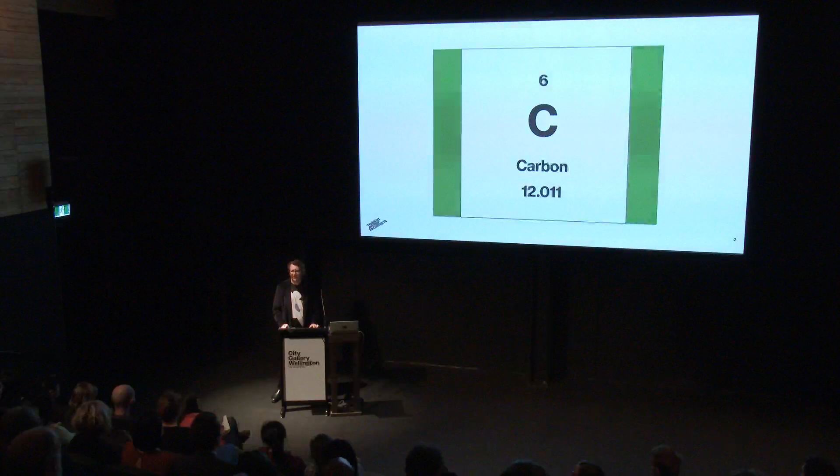But shortly thereafter, we worked on East Gisborne Airport with Eastland Group. Caitlin here, Caitlin there, put your hand up Caitlin, I was going to embarrass you. Caitlin worked on LCA Quick with the BRANZ free spreadsheet tool, and we analysed some steel portals and purlins for the building, transferred them from steel to timber, and saved 34 tonnes of carbon.

So we started learning about the numbers then, but we didn't really know what the whole building carbon was. Later on that project we employed a firm called eTool from Perth, and did a full LCA across all the modules, which I'll talk about shortly, and understood more about the carbon on that project.

After that, we've done 3 or 4 more eTool LCAs with an external provider. Caitlin has done BRANZ LCAs for other architectural firms, and we've also brought on One Click LCA to the office about a year ago, trying to bring that through as a business-as-usual tool. Everybody who's drawing is understanding how LCAs go together because it's a plug-in to our drawing program.

My discussion's got 5 parts. One, I'll talk about the global context and tell you why carbon is an issue, in case you don't already know. Two, I'll define a few common terms, because there's a lot of jargon as well. Three, I'll explain why it's an issue for us in New Zealand. Four, I'll show you what we're doing in our practice, 2 projects which are really pushing some boundaries.

And lastly, I'll give you some tips or thoughts about what we can all do - consultants, public, contractors. So to start, those 4, or actually 5 slides.

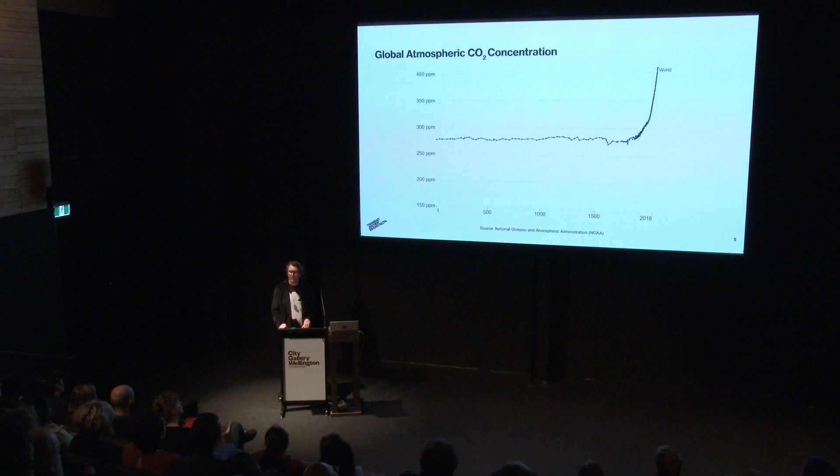This next slide is from the IPCC, the Intergovernmental Panel on Climate Change, and it's part of their conclusion that humans are responsible for climate change. I've also been reading recently that half the greenhouse gases emitted since the beginning of the Industrial Revolution have been emitted in the last 30 years. So we've had a couple hundred years since the Industrial Revolution, but half of those emissions came in just the last 30.

This slide shows the IPCC's 5 scenarios, depending on what we do and don't do. The decade we're in now is critical to how children will live, how much rain will fall, and how hot it will get. We're now at the bottom left, on that solid black line, but all the different coloured zones represent the different scenarios depending on how all countries respond.

It's important to note this is a global issue - no one country can solve it, it needs a global solution from all countries. An added complication is that rich countries have emitted more, and for longer, than poorer, less industrialised countries, so we need to help them become more carbon efficient. An Oxfam report found that between 1990 and 2015, the wealthiest 1% were responsible for more than twice the emissions of the bottom 50%. So we certainly have some work to do.

Starting from that bottom scenario, the 1.5 degree pathway - that's what we're trying for, what 198 countries signed up to in the 2015 Paris Agreement. But from my understanding, looking over the weekend, we're already at 1.4 degrees, unless this is an aberrant year - but they all seem to be aberrant.

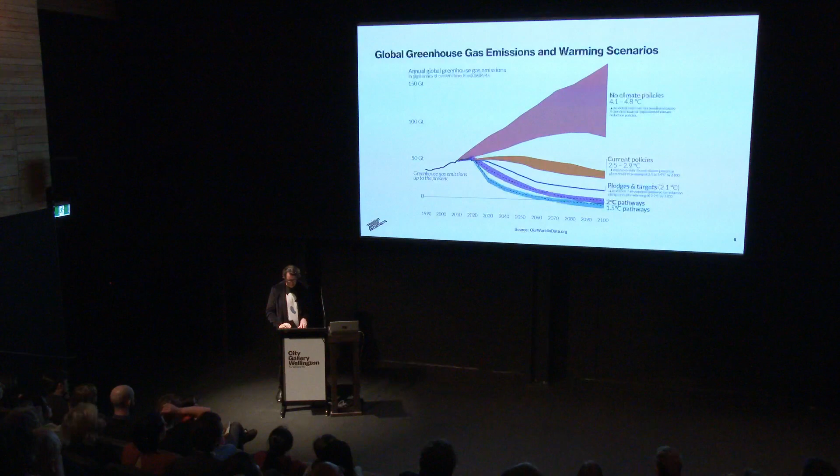The 2 degree pathway above that has more impacts and is more likely. The next pathway is current pledges and targets globally, so 2.1 degrees. Current policies - the actual policies in place - give us 2.5 to 2.9 by 2100, that's the orange band. And if we do nothing at all, obviously 4.1 to 4.8, which is pretty catastrophic. But it is just a graph.

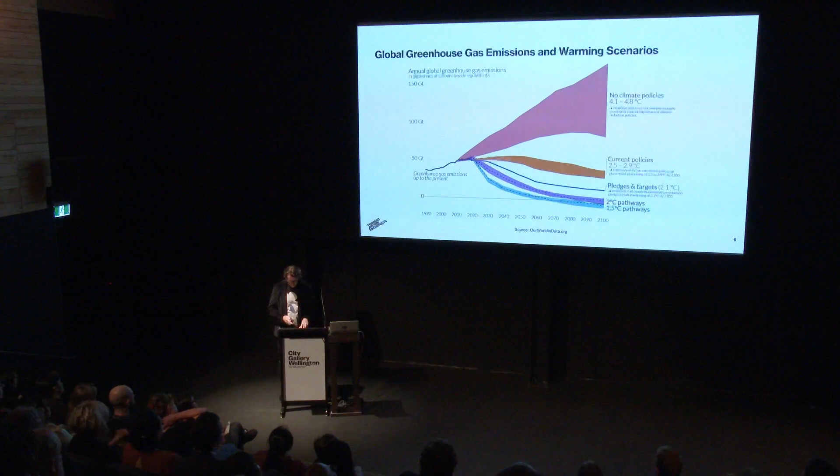Parts of the world may become uninhabitable, and it's going to affect everyone.

So that's the context we're living in - that's the risk to all our futures and the reason we need to work together. But as I said earlier, we've got to be positive, and I feel there's a lot of hope. But that's the hard part.

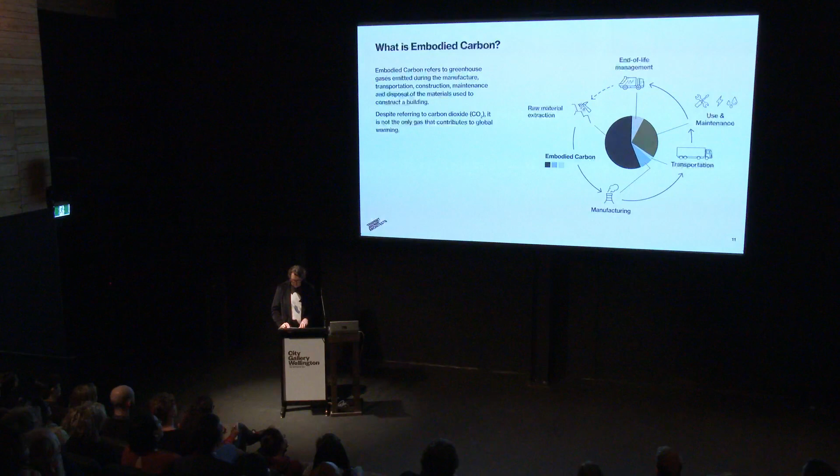So enough of definitions - what is carbon? We have embodied carbon. Embodied carbon refers to the greenhouse gases emitted during the manufacture, transportation, construction, maintenance and disposal of materials at end of life, used throughout the life of the building. So this highlights that when we measure carbon in a building through its lifetime, it's not just when we buy a product or build the building, but through the whole lifetime.

And as we've just noted, CO2 is not the only gas that contributes to global warming. This slide shows that in more detail. On the left, the bottom, it's our common metric, carbon dioxide, because it's the most common greenhouse gas. But as you can see, 1 kilogram of nitrous oxide is equivalent to 298 kilograms of CO2, and it's a byproduct from the manufacture of nylon and fertilizers.

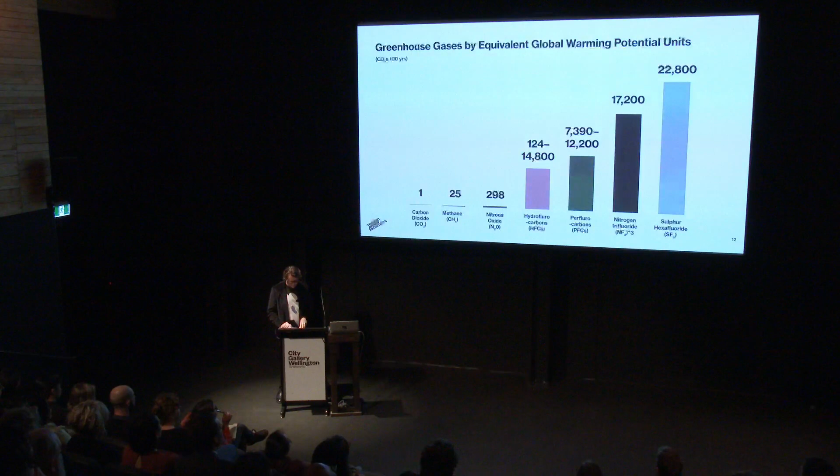But much worse, way over there, sulfur hexafluoride - that's in electrical transmission equipment, I believe. It's equivalent to 22,800 kilograms, so almost 23 tons of carbon per kilogram of that product. So kilograms of CO2e puts all these things in the same relative terms.

There's a complication here as well - there's a lot of complications. These gases all happen to have different lifetimes in the atmosphere. CO2 is 300 to 1,000 years, nitrous oxide is 150 years, and that sulfur hexafluoride is 3,200 years. So you're measuring these things in all different ways, but kilograms of CO2e is trying to use the common metric.

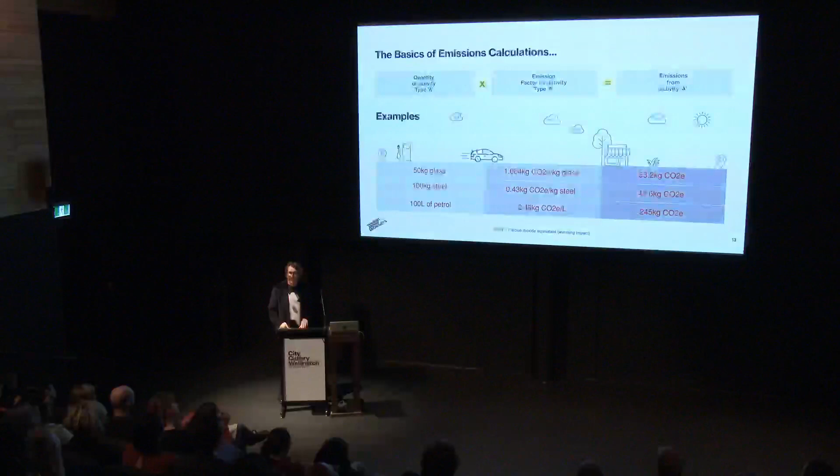Just the basics of calculating carbon for a building: you have a quantity of a material - a volume, an area, or a weight - and you multiply it by an emission factor. So of the three examples, I just took kilograms of steel. You've got 100 kilograms of steel, 0.43 in this chart per kilogram of CO2e, and that gives you obviously 43 kilograms.

Now, to do an LCA for a building, you do this for every single product in the building, and you do it through the whole life cycle of the building.

So these stages are the carbon modules - this is the life cycle assessment in a building. There are 5 stages, A to D, from extraction of the raw materials way over here, and then transporting those raw materials. So that might be like iron ore coming out of the ground, transporting the iron ore to a factory, making steel out of that iron ore. That's the production stage, where you're making a product.

And then comes the construction stage, where most of us consultants get involved. You transport that product from the factory to the site - that's transport - and then you put it on the site, so that's where we do the building. As an architect myself, that's where we live a lot.

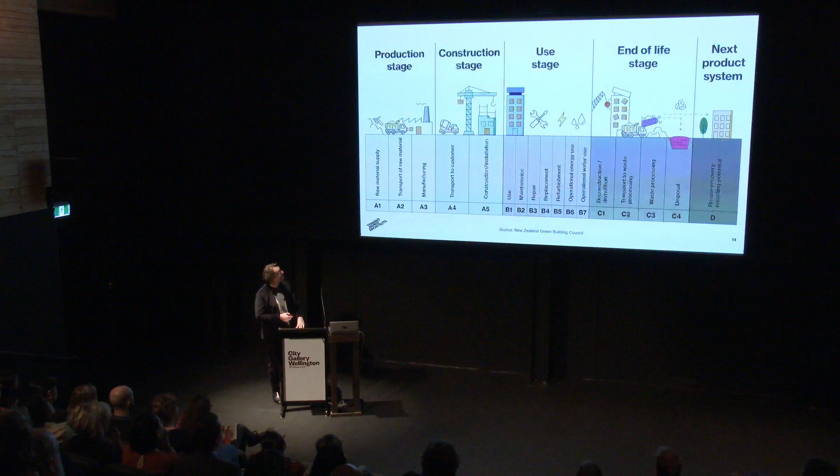So, upfront carbon - upfront carbon covers these stages, A1 to A5.

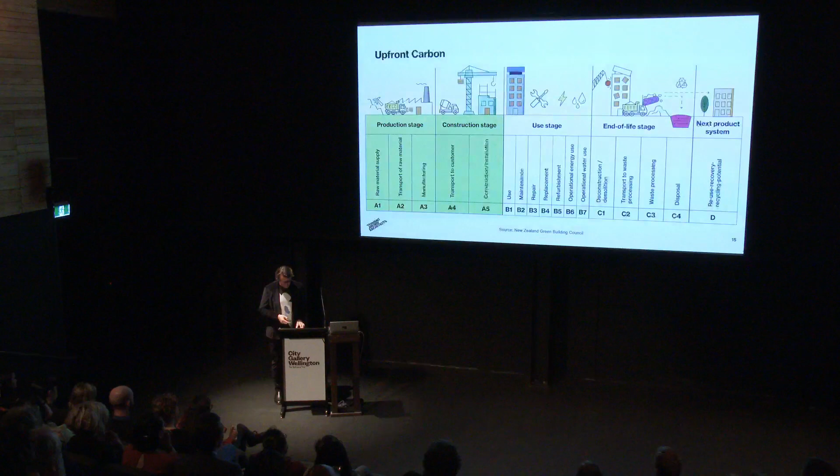And we've gone through those stages. They're also known as upfront carbon, or cradle to practical completion. But they're obviously only part of the impacts. Whole of life is all of these stages excluding the operational, so this is embodied carbon across the whole life of the building.

It excludes B6 and B7, the operational stages, which I'll talk about in a minute. So you've got the use stage — when you're using a building, you may have to repair the roof or repaint it. That's all embodied carbon through the life cycle. Then you've got end of life, when the building's deconstructed and transported away for disposal — some buried, some burnt, some salvaged and recycled.

And way at the end, D is what's called beyond the system boundary — the potential to recycle materials and bring them back to raw material, using the term circular economy. That's happening more and more in construction, but there's a lot of distance to go there.

So back onto operational, which is the remainder — B6 and B7, energy and water. Basically the energy and water use of a building through its whole life cycle, through its 50 or 60 years of life.

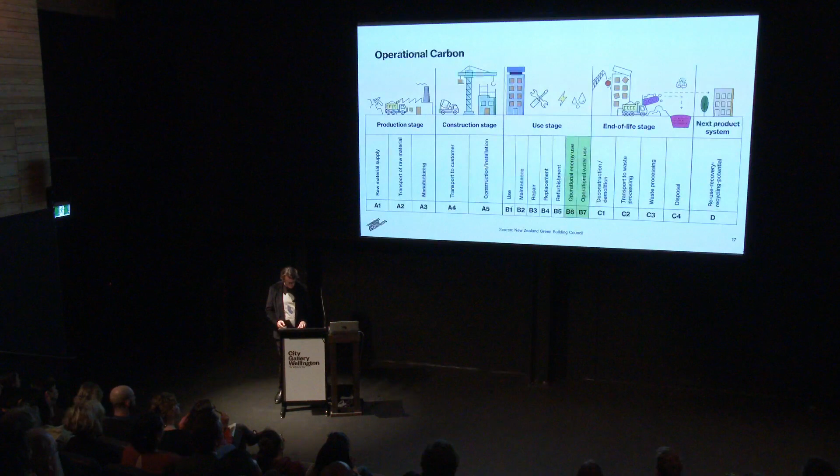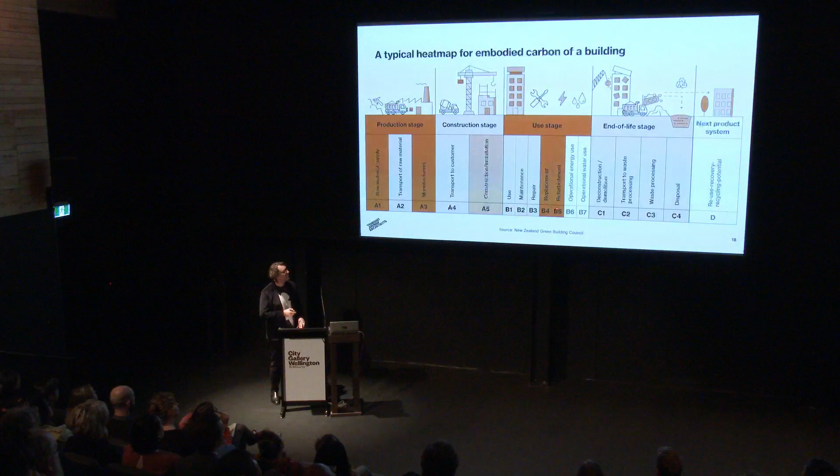This is showing the intensity of where carbon impacts occur — in extraction of raw material, manufacturing of products, and then refurbishment and replacement of things through the life of the building, because it's over such a long time. Construction itself is not quite as intense, and you can see how it sits, but these are the main areas of concern.

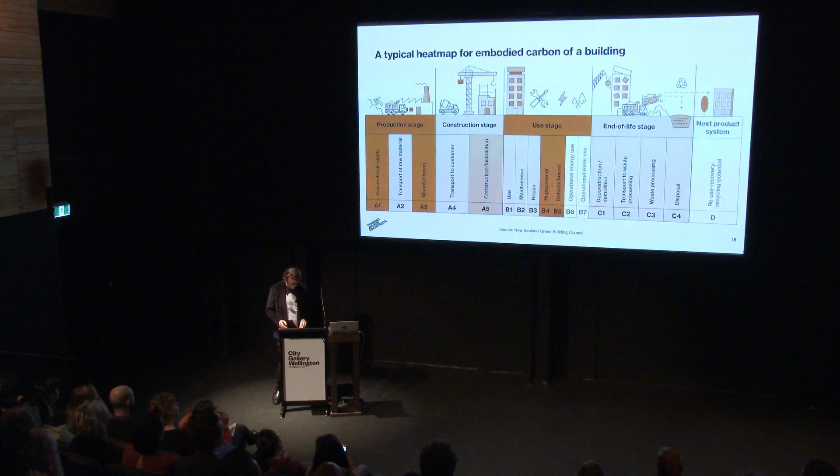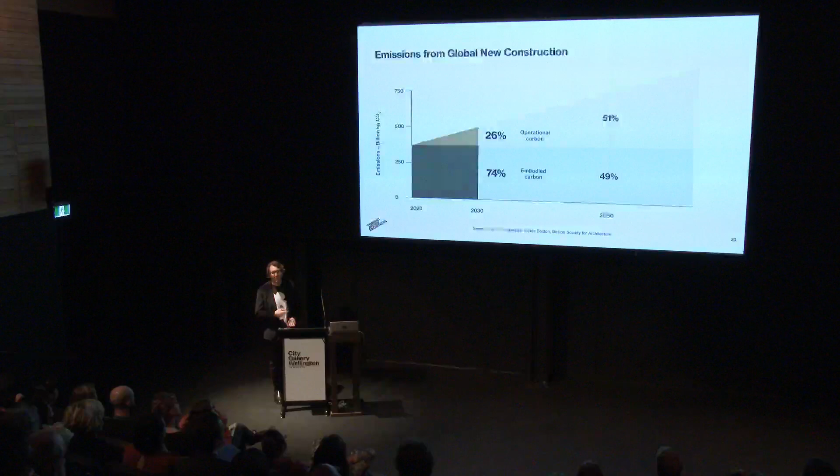So looking at the same information in a different way, this is a cumulative graph. The green again is embodied — it's a big hit upfront. When you've just built the building, you've only got embodied carbon; you haven't run the building at all.

So the brown is the gradual increase over time of the use of water and energy. You can see that after about 10 years, the ratio turns to roughly 3:1, but by 2050, if you're saying 30 years, it changes proportion to 50-50.

So that gives us an indication of what we need to be looking at. We need to be thinking about embodied carbon in the short term, because time is important — we haven't got much of it.

So the next question is, how does that impact me or you? I'm going to give you 6 reasons why you have to do something, why we in the building industry have work to do, and even small New Zealand at the bottom of the world must act now — it needs significant changes to how we work.

So reason 1 is we have a very high carbon footprint. And as Tina said, 39% of global greenhouse emissions come from operating the building and the materials within the building. That breaks down like this: 28% operational, 11% embodied. It's lucky we matched up, Tina.

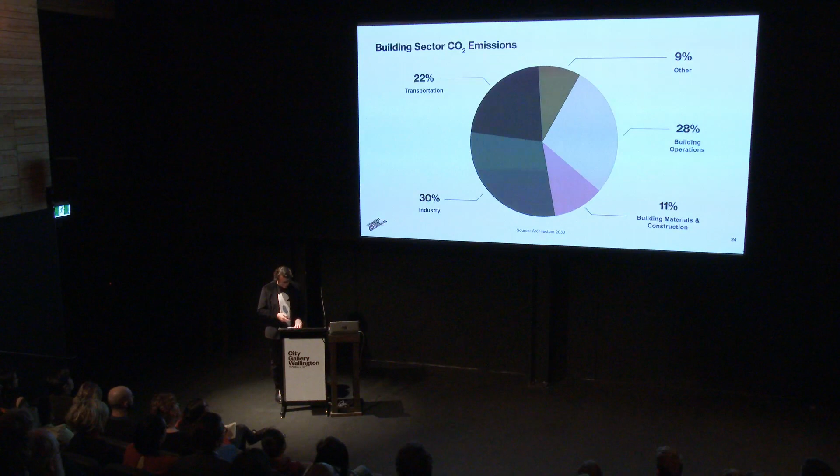And I read recently in a UNEP report that there are 3 materials responsible for 23% of global emissions: concrete, steel, and aluminium. These are responsible for 23% of emissions, and cement production on its own is responsible for 8% of emissions.

Reason 3, this one always surprises me: we have a rising demand for buildings globally. As predicted by the UN, by 2060 the world globally needs 230 billion square metres of additional, constructed, or renovated space. That's equivalent to building New York City every 34 days for 40 years.

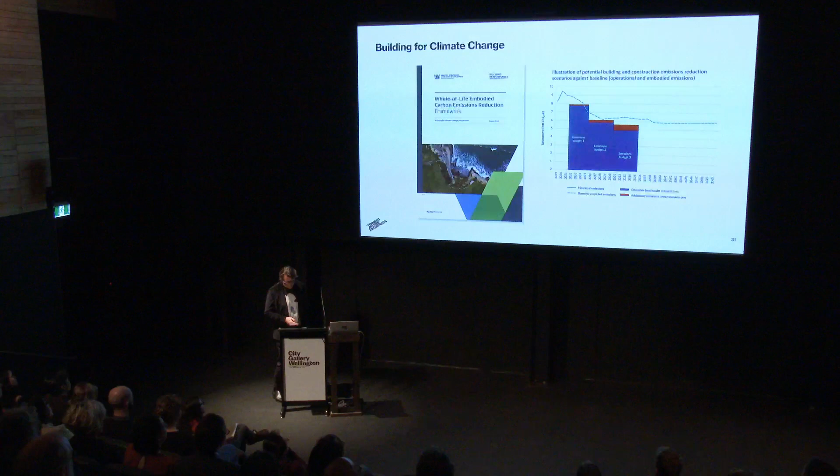Reason 4, the regulatory landscape. New Zealand's committed to carbon neutrality by 2050, along with 70% of the world's economies. This is the MBIE framework issued in August 2020, and on the right-hand side, that's the next 10 years of planning for reducing carbon in the construction sector in New Zealand. This timeline from MBIE shows that in 2025 we're looking at reporting carbon in our building consent process, for all commercial and residential projects.

Don't know what will happen with change of government, but we still have to do something by 2050. We still have to get to carbon neutrality - that's buildings of zero carbon impact.

So even though we're a small country, quite green, far away from the rest of the world, we still have to do something. I looked it up, and we have 0.15% of global greenhouse gas emissions, which is very small. But our global per capita footprint is 3 times the average, and we're also the 4th highest per capita emitter in the OECD. So to remain competitive in international markets, we're going to have to get better. And last week, the European government passed a directive that all EU countries will carbon account for all buildings over 1,000 square metres by 2028, and all buildings by 2030. So that'll put a lot of pressure on us to be as green or greener.

Reason 5, market demand and investor pressure. We'll find that investors and banks are driving this change. Commercial developers are reacting quickly. I already have large commercial clients like Precinct Properties - we have green finance that requires green ratings for all their buildings. Large corporate tenants now come with green requirements, and government organisations have a requirement to report on carbon annually by 2025 and show improvements. Our Māori clients have kaitiakitanga requirements, and actually they've been the ones that have taken me on this journey.

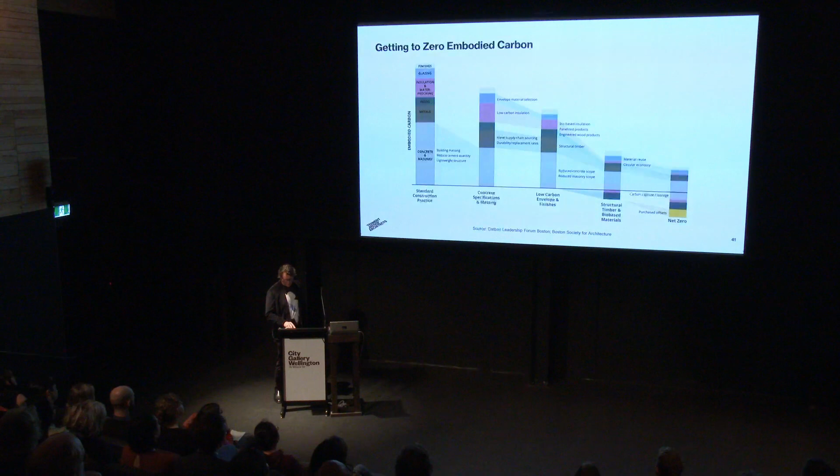The other thing we're doing is benchmarking our projects against each other, competing with yourself. This is what can occur when a project is measured for embodied carbon. The first column on the left is business as usual, a commercial building. The next column is reducing the cement carbon impacts with some cement replacements like slag, pozzolans and fly ash. Then more carbon efficient product selections, then maybe bio-based materials, and lastly carbon capture, sequestering options and offsets. You can see how the total carbon above the line has dropped significantly. That's the driver - we've got to drop that total amount.

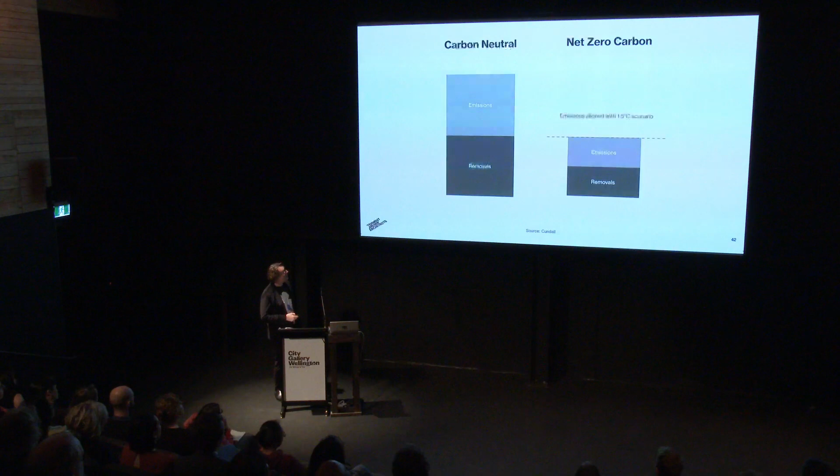To be really clear, it's not normal emissions and then buy a whole lot of offsets. It's drive your emissions down to a level that we need to get to, and then offset to achieve that 1.5 degree target. So it's a bit of a paradigm shift for us in the construction sector.

To bring up the unspoken question that architects normally don't talk about, which is carbon impacts on business: between 1990 and 2017, the UK economy grew by 60% over that 27-year period, yet its carbon emissions declined by 40% in that same time. So what we have to do is grow economies and drop carbon at the same time.

So to sum things up without graphs, here's what we're doing in our practice. This is a project called Pā Reo, in Ōtaki for Te Wānanga o Raukawa. It's our fourth project here. We started working on this in 2009, I think it is. It's 4 buildings, 2,000 square metres, and a living building challenge project.

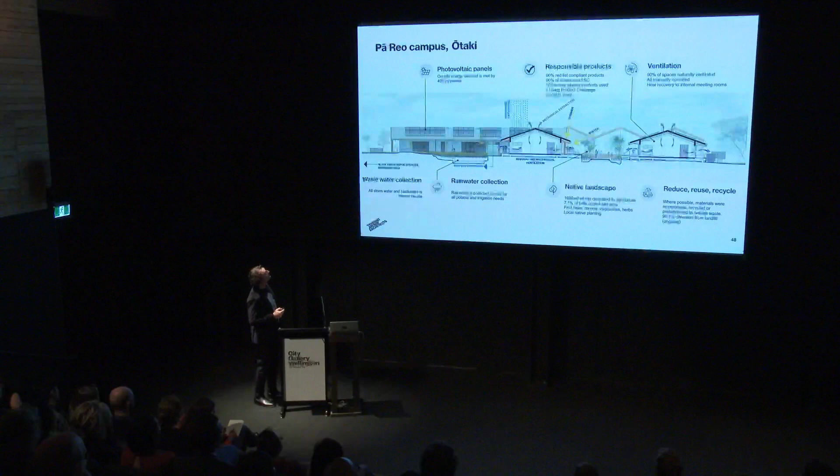We designed raised timber floors instead of concrete slabs, and minimised steel. Here's a section of the project, with PV panels — 495 panels. This is our red list; we have to get 90% compliance with it. Very hard to do. It's taken us — Caitlin's been with us for 7 years and we've done 5 projects. So it's a lot of research.

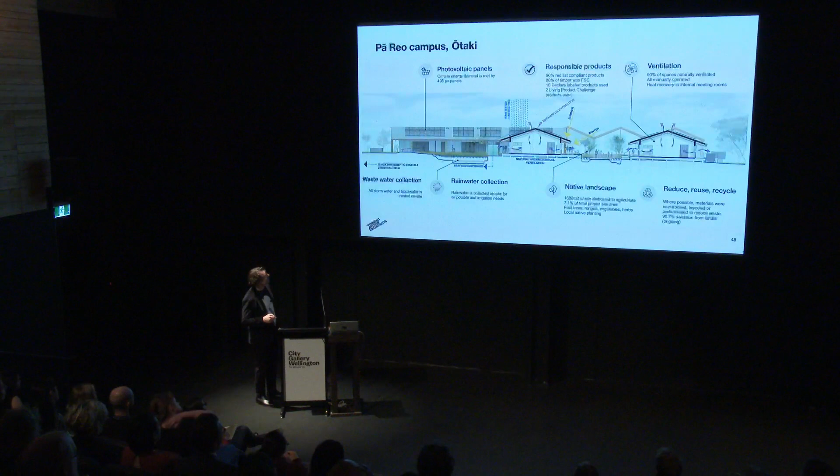Ventilation — lots of natural ventilation, 24 skylights in the main Te Moana or Rakawa building, and cedar louvers for natural ventilation through all the buildings. We just talked about waste diversion; there's also landscape, food production, and rongoā right through the buildings. Rainwater collection — here's a section through the wetland where 32,000 litres is stored, underneath a rain garden. Then our wastewater, blackwater treatment, and we manage all stormwater on site.

The other project, which you may have seen, as Tina mentioned, is the Living Pa at Victoria University — a 3-storey, 3,000 square metre building. You can't quite see it, but the Wharenui is just in there somewhere. It's for Te Kawa a Māui, Māori Studies at Victoria University, and it's connected to and supports the Wharenui. There'll also be the sustainability office and PVC Māori in there.

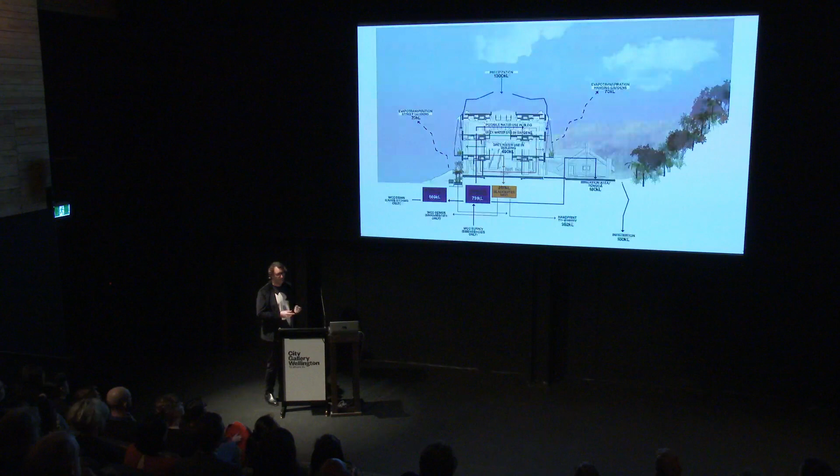This is the hydraulic cycle of the building. Essentially, we capture all the roof water and use it, putting it through carbon filters and UV filters to make it potable. There's other water that's kept for irrigation.

We collect grey water, so that's water off wash-hand basins and showers. That's in a couple of 10,000 litre tanks, I think. And that splits 2 ways. One goes to the planters on the side of the building, and one half of it goes that way to those things.

And then the excess from those goes to a land-based stepping planter system on the street. And then the excess from that goes into the blackwater treatment plant, the wastewater treatment plant. The other half goes to flush the toilets. We have vacuum toilets like in a jet aircraft, they only use 0.7 litres per flush, and then they end up there.

Now, the next thing that happens is out of the blackwater treatment plant, we take 352,000 litres of water a year and flush the toilets in the Murphy building. So essentially no water goes off site until some of it's gone through another building.

And what else is happening there? We've got evapotranspiration, you can see from the plants. So it's quite a feat to make the water work. It's a very difficult site.

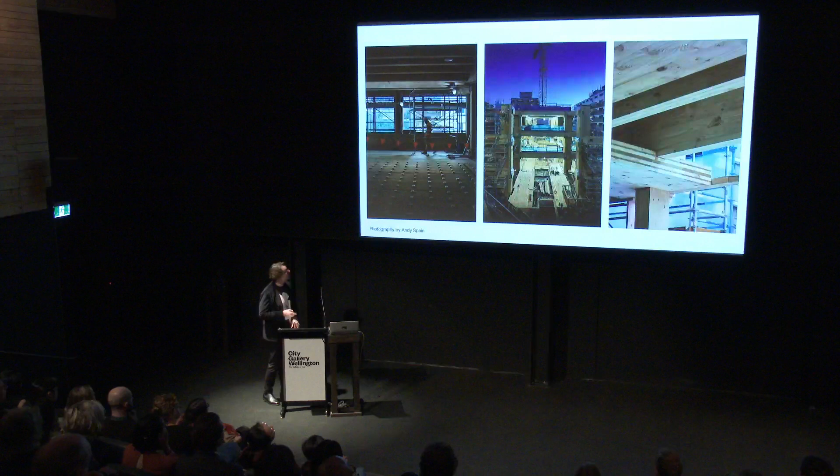These are some photos from Andy Spain. Got a raised floor system, you can see the little blocks. It's 150 mils high, and that's where a lot of our services run, then punch through the floor to the waffles below. This is sort of quite a good shot.

It shows a section of the building. This was just before Christmas, and you can see the CLT floor slab on the ground floor, and a little bit closer up you can see what CLT looks like. It's laminated and crossing directions, and it's a bit like a licorice all sort, but quite thick.

And then one of our last bays, where they're dropping in the panels, moving some of the columns around.

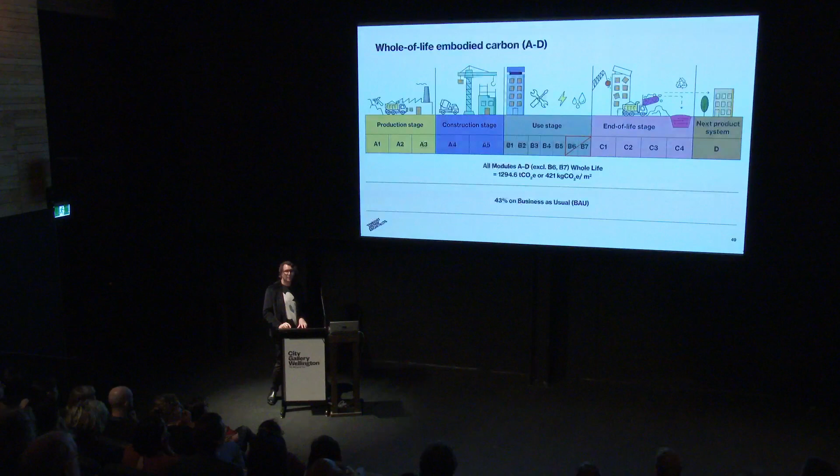And again for this project, carbon, 1,294.6 tonnes for the A to D, which is 421 kilograms per square metre. So a very good result, and a lot of sequestration, 43% down on business as usual. And when I say business as usual, when you do an LCA through eTool, they do a whole model of a normal building, so you can see how much you're saving.

And then to finish, just some thoughts of what we can all do. If we're working in construction, what you can do, and if you're not working in construction, if you employ someone, you can ask for. So act now, like I said at the beginning, collaborate with people, because it's not just about one person doing the work, it's about a whole lot.

Build less. Probably one of the best things you can do is to take 10 square metres off a building, 5 square metres off a house alteration, take out another ensuite, get rid of those ensuites. You can build less, build with less. So simplicity of detailing, to all the architects out there, keep it simple, because if you have less stuff in the building, you've got less carbon.

Fix what we have, a bit like just through that wall, the library is being rebuilt. There was an option to knock the whole thing down and build a new one, but by keeping the concrete frame, there's significant carbon savings. So we're going to have to reuse buildings, reuse parts of them, reuse all of them.

Carbon literacy, upskill the team. Upskill the team and make sure everybody gets carbon literacy. Understand rough carbon, like we'd understand rough cost, and that's still something I'm still learning about.